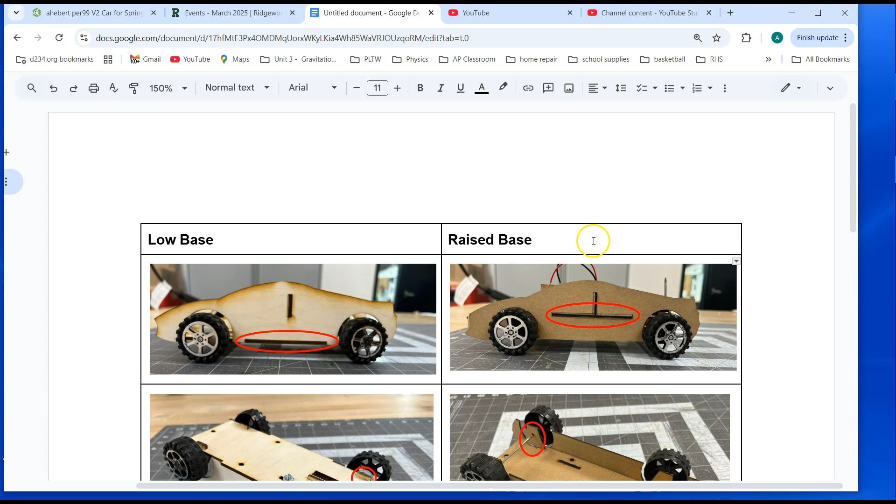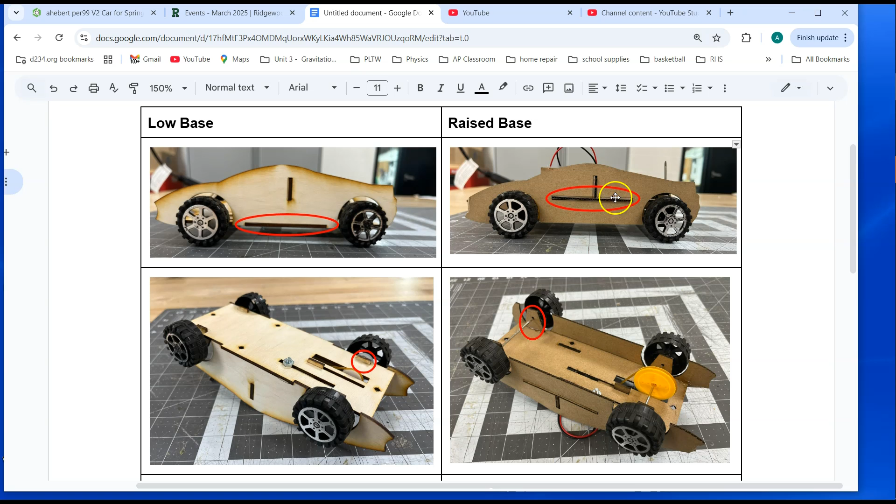Make sure you have chosen to go with the raised base, where the base of the car is not flush with the bottom of the side pieces. It's actually raised up a little bit, like this. If that's what you're doing, you're planning on having axle holders sticking down, as opposed to what you see over here on the left. So if this is the style you've chosen, you're in the right video.

All right, so right now you probably have a sketch that looks like this. First thing I would do is go to sketch 1, your image, right click and suppress so we don't have to look at it. Then go to sketch 2, right click and edit.

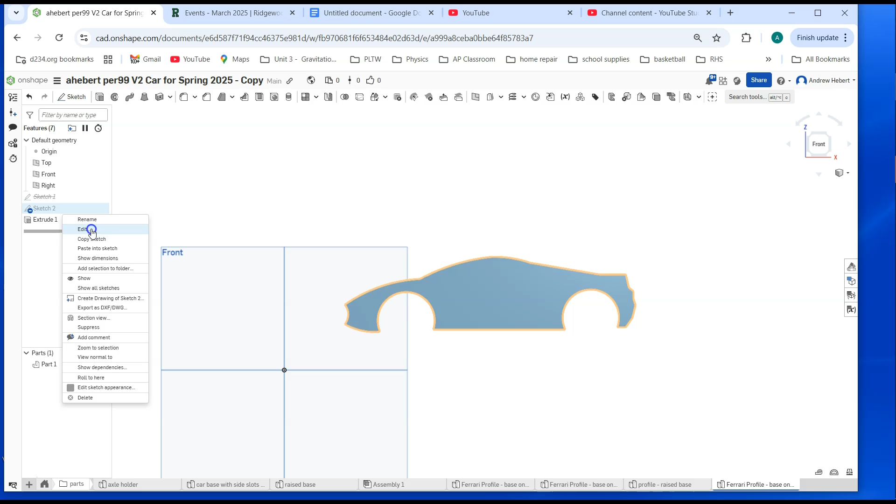Now you may have already put a dimension in your sketch to size from axle to axle as shown in a previous video. That was a mistake. The reason why is because the wheels probably don't fit. If I hit the dimension tool and check the dimension of this wheel well, it says 0.68. It needs to be closer to 0.88, 88 hundredths of an inch radius, in order to get the wheel to fit. So I'm going to turn off my dimension tool.

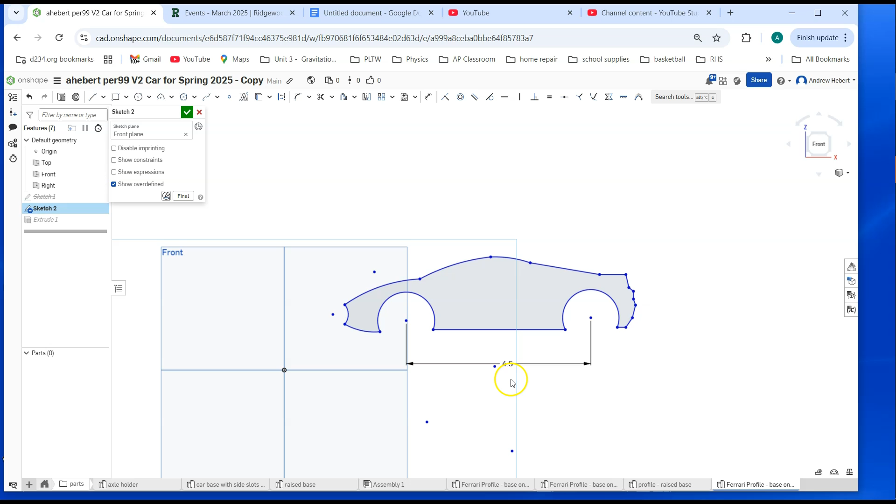I'm going to right click, delete that dimension. You want to delete any and all dimensions you have on your sketch. Right click, delete. This is going to guarantee that when you resize the wheel well, this thing right here, and this guy right here, the whole car maintains its shape in proportionality. So when you stretch it lengthwise, the height also stretches.

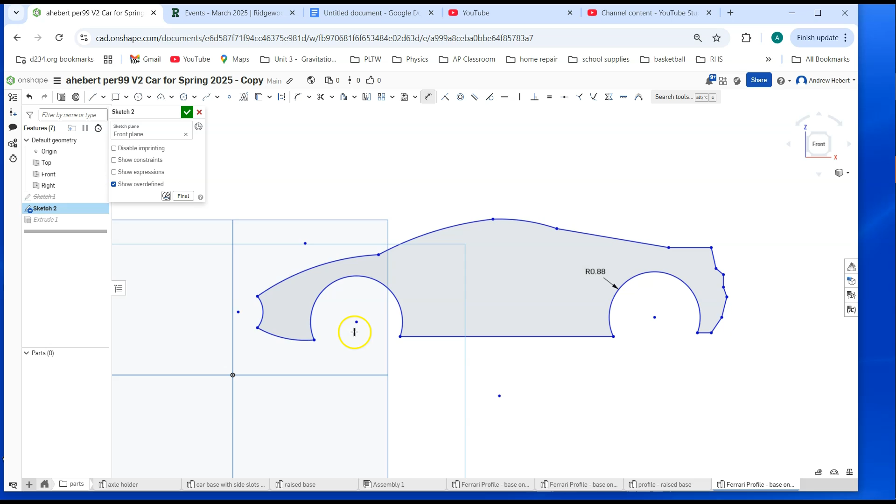So we're going to put our dimension tool on now that we've removed all dimensions. Go to the wheel well, click once, and drag. Click again and type in 0.88, 88 hundredths of an inch. Now watch the car when I hit enter, the car gets bigger. So if you remeasure from axle to axle, this is not 4.5 anymore. It got bigger. Don't redimension it.

Just whatever it is, just leave it there. Don't put a new dimension in. So just to review, I had my dimension tool on. I clicked once, I clicked twice, and then it's giving me the dimension based on the fact that I just put in 0.88 for the wheel well. I just click a third time and hit enter, and I'm going to go with whatever it is.

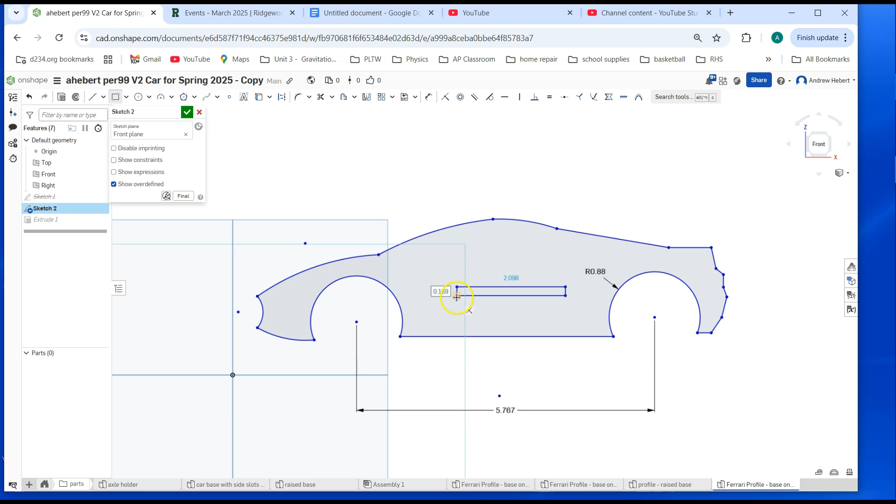All right, what we need to do is create a slot over here for the base of the car. So I'm going to turn on my rectangle tool, come right about here, click once, and drag. And you might be saying, how big do I make it? Where does it go? I'm just going to tell you somewhere near the middle, but make sure it's above this point. The whole idea is from here to here, there's a vertical distance.

And what's going to happen is the base is going to extend out, and then from this line, the axle holder will go down. So it doesn't matter exactly where it is. If I were you, I would put a dimension from maybe the top of the slot to the bottom of your car. Make that a vertical distance of 1 inch. That's a good number.

And then horizontally, let's go from this corner to this corner, 0.5. It does not have to be 0.5. You can make it whatever you want. You might laser cut it and then adjust it.

So same thing on the other side. Let's go from this corner to this point, right? I get my diagonal, I go straight down, it becomes horizontal, click 0.5. Okay, I'm going to hit escape.

At this point, I'm going to draw another slot. This is not for the base, this is for a little piece that goes from the left side of the car to the right side. I'm going to turn on my line tool, and start kind of in the middle. Click once, drag straight up, click again, go over, click, go down, click. Okay, I'm going to escape.

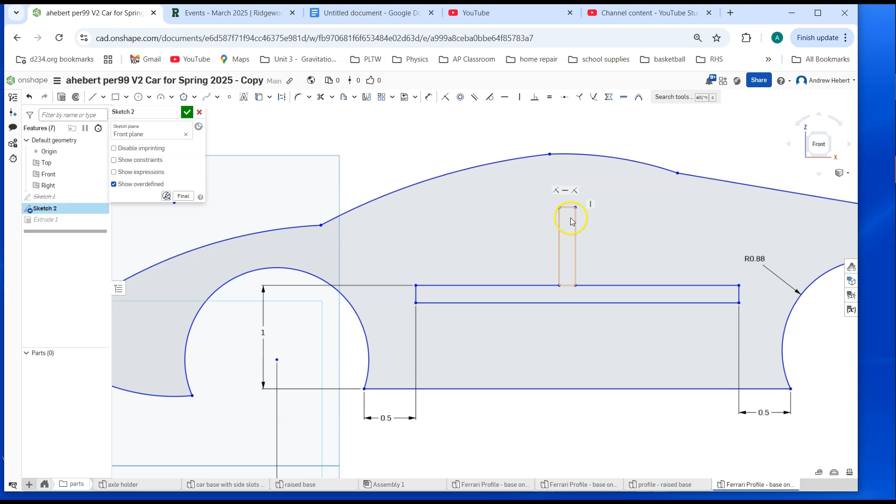Now, where do these lines go? Well, you just want this vertical opening to be somewhere near the middle of your car. I'm going to throw in a dimension that puts it near the middle. So I'm going to turn on my dimension tool. I'm going to click once, click twice, and I want this to be a horizontal dimension. Click, and at 1 point, it's about 1.4. I like the looks of where it is, so I'm going to hit 1.4.

Height-wise, the size of this line right here, I'm going to click on it and drag. I'm going to go with 3/4 of an inch, 0.75. You might want to make it a little bit bigger after you experiment, but I think that's a good number.

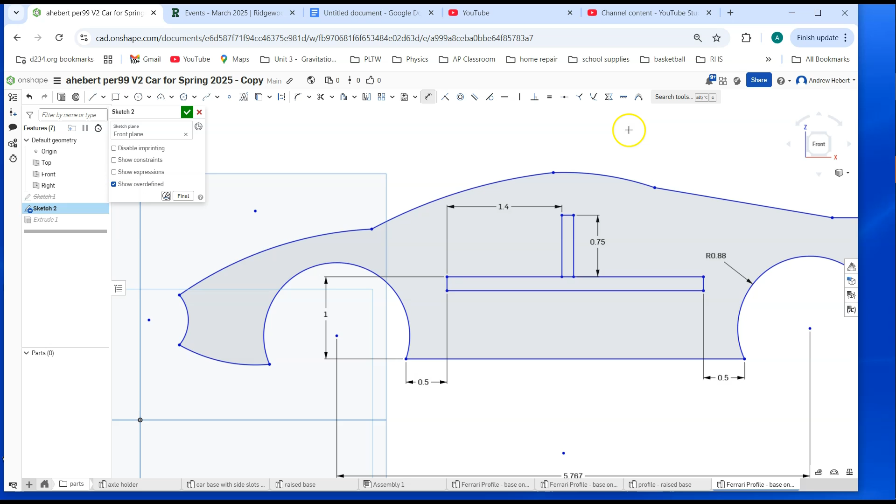Okay, so let's take a look at what we've got. I'm going to hit the check mark. We've just created some slots, and they look pretty good. Don't forget, you can always modify if it doesn't quite work out, but this is approximately what you want it to look like.